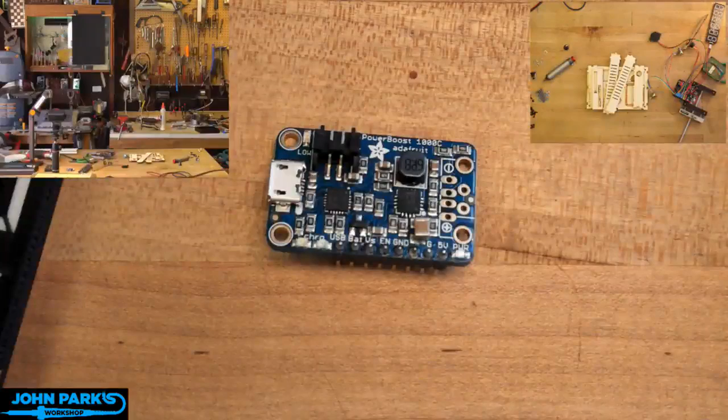So these are the kind of three cameras I've got now. I've got my main workshop camera, I've got the overhead workbench camera that I put in last week, and now I've got this little down shooter that you can see here. This is the same one that Lady Ada uses for her live shows. I think she actually has one in her apartment for the Desk of Lady Ada, as well as one at Adafruit for the Ask an Engineer show.

So this is great, it's called a hover cam. Actually hard to find, they're out of stock most places, but I got my hands on one. And it has an HDMI out, which is the key thing for the way my setup works. It has a decent autofocus - not perfect, but I set it on, I think it's a locked focus right now, down here where things tend to be. So there's my camera remote. Here's an object, so excited about that.

Let's see, I can move my little camera switcher back here, and I'll go to the main workbench cam and talk about what we're going to talk about.

Okay, so last week we built the little demo of the Neo segment display, so that's this guy here. Actually, I'm going to switch back to that view for you for a second - I should go to this one. So I've got this Neo segment display, and I've also got my little phone pad keypad, Matrix keypad.

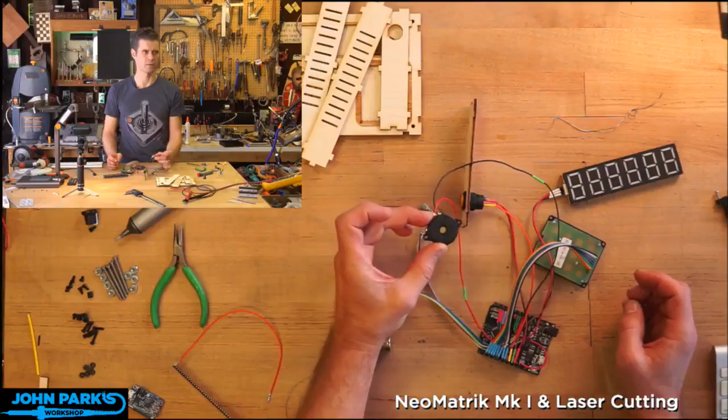Now let's talk about the larger scope of the project. I'm going to take this off of that little clamp there. So we had last week the NeoSegment and the phone keypad, and in the interim, I also added a speaker. I don't think I had that on last time. Let me zoom this camera down in a little bit.

Let me know in the chat with lots of exclamation points if you have any concerns about the camera. I think that one's in focus, but I can't see it too well. Hold on, I'm going to turn on a couple of monitors over here that'll give me a bigger view.

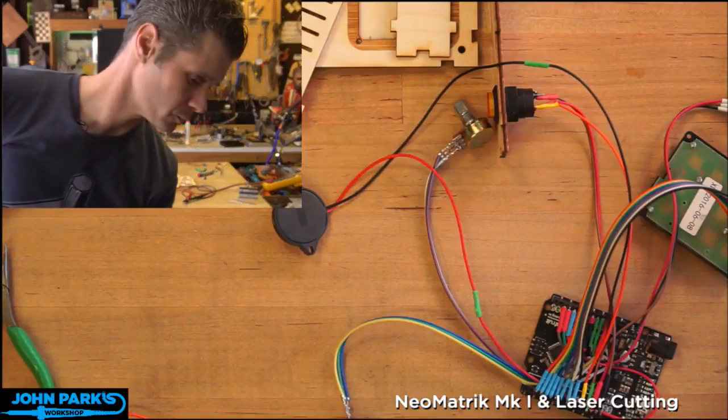If you've ever wondered why a TV station employs a lot of people, it's because there's a ton of things to actually keep track of. Uh-oh, did that break something? Whoa, what is that? What on earth? All right, I'm turning that up. Oh, that's a photo from our Alaska trip. I'm glad nothing embarrassing showed up.

When I just turned on a monitor that this camera up here is plugged into, it used HDMI control to talk to the camera and convince it to start playback. It's doing it again now. That's funny, sorry about that. Okay, so I'll rely on that monitor for this one.

Okay, so I've got a piezo buzzer that I've attached to this so that I can have some sound feedback, and I also added a button. So this is a little lighted switch, actually an on-off switch, and a couple of potentiometers.

Now, I can demonstrate this before we put it together. I think that's probably a good idea. So what I've decided to do is take this concept of - originally I just wanted to test out the NeoSegment display and the phone pad and type numbers onto there. I've now turned this more into a platform for building either a user interface or something like a music sequencer. You could use this to build puzzles, for a crypto challenge, mystery box, escape room kind of thing.

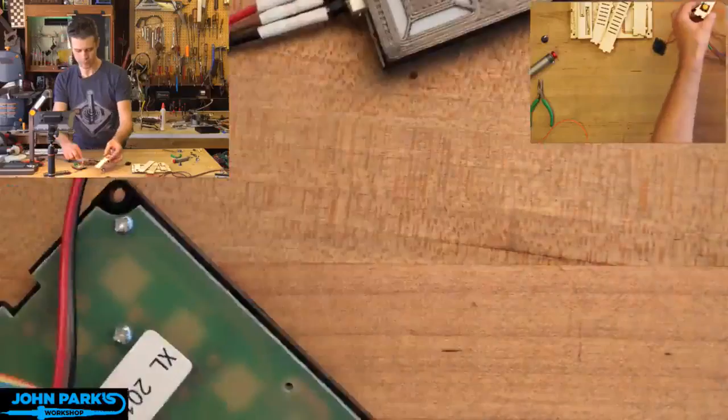And now check this out. When I go to the NeoPixel display, if we go into, this was me pressing the little star key. So what I'm seeing right now is I'm printing the word hue, and then I'm seeing a hue value over on the right as well as the color of that hue. So this is kind of like a little color tester.

I talked with my friend Tod Kurt and Tony DiCola about wanting to use hue, saturation, and value instead of red, green, and blue to talk to these NeoPixels inside the segment. HSV is another way to express color instead of a mix of red, green, and blue. It's a continuum of colors that goes 360 degrees around a wheel - that's the hue part. Saturation is a linear value from unsaturated to fully saturated, and value, or brightness as it's sometimes called, goes from gray to black in the luminance or brightness.

So just by converting this project over to use hue to express the red, green, and blue values, life gets a lot easier when you want to mix colors. So what I've set up now, I think it's this top one, it'll be easier when it's in the case, I have a knob here, and I can dial in different values.

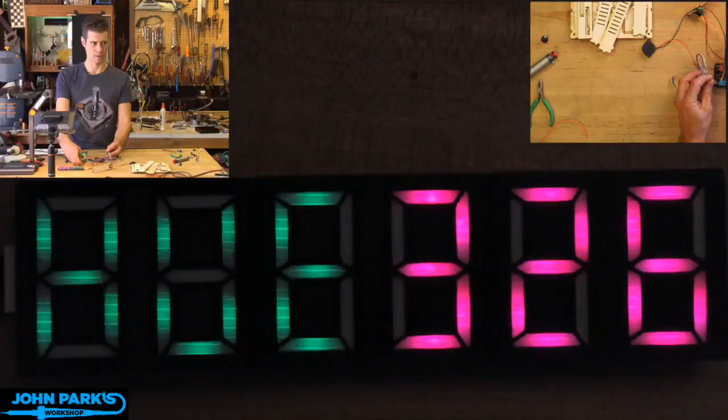So as I change the hue, we'll start at towards the bottom of the wheel, it's red, and then I get into yellows and greens. We'll get up to blue. And you can see for fun I'm also increasing the pitch of the speaker every time I press it. And then back up to red.

And then what I've also decided to do is take that and use that hue value for other things, which I'll show you once we get it all put together.

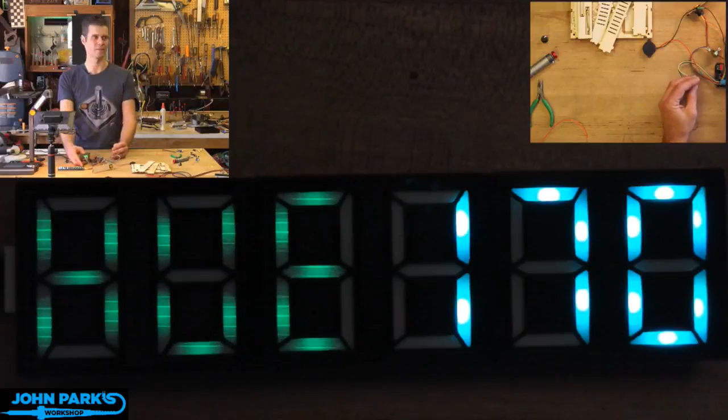The other knob, since we've got this nice close-up right now that you can see, gives us a value, which is the brightness. So we can dim it basically with this, and that's full brightness, which you can see the white kind of starting to peek through there. But that is kind of blindingly bright for me, and here not so bad on the camera. I'll turn that down to something a little more moderate.

Okay, we'll fix that exposure back to something about there. I know you can't see the LEDs too well now, but we'll look at some other stuff as we put this together. So that's the idea behind the project, and what I want to do now is if we take a look at this mess of stuff.

What we got to do next is come up with an enclosure for it. So what I'm going to do is switch over to the computer and show you a little bit of the workflow that I used to come up with an enclosure for this, and some of the little tips and tricks for developing a laser cuttable enclosure, which is similar to some degree to setting things up for a plasma cutter or a water jet, because you can deal with incredibly thin lines, almost no tooling to worry about.

Or you may adjust this a bit for more of a CNC workflow, but you'll see a hallmark of this type of construction is, let's see, has my camera - oh, that camera didn't switch, that's weird. I don't know that that changed over to broadcast what I wanted you to see.

Let's push that over. All right, one second, I'm going to go over to the computer and see if you're all yelling at me that everything broke. I hope not.

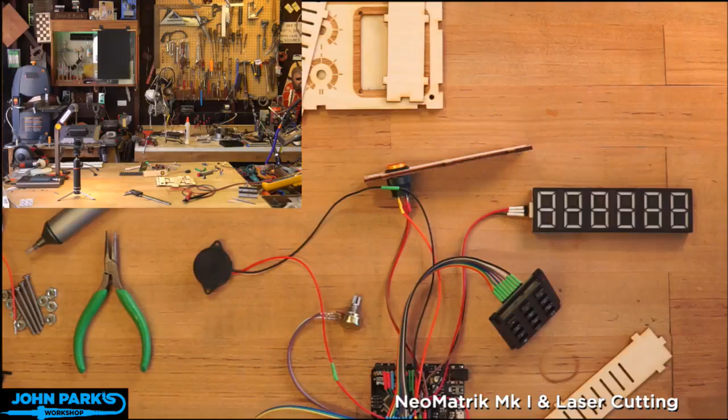Someone on YouTube asked about having letters on Neo segments, but this doesn't have so many segments. The Neo segments can do it, actually. I wrote it down, I have it in my code, I can show you the letters that display well. There are plenty that don't, like M, W, and X—anything with diagonals.

Is that thing just pegged? The CPU is pegged on this machine, so it may be lagging a little bit.

Hey, thanks for the comment about the awesome t-shirt. I was actually thinking of doing a joystick-based project today, but bailed on that when I hit some difficulty, so I'll be doing a joystick project coming up. This t-shirt is by my friend Coop, Chris Cooper, an awesome lowbrow hot rod artist dude, amazing artist, and this is his version of an Atari joystick.

I'm not sure why, but my broadcast display is lagging behind what I'm telling it to show.

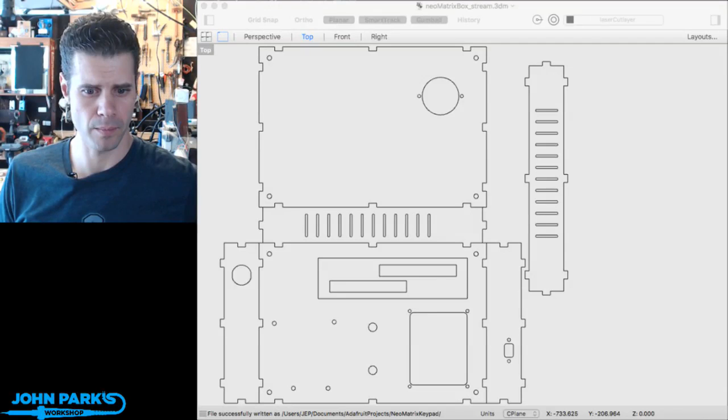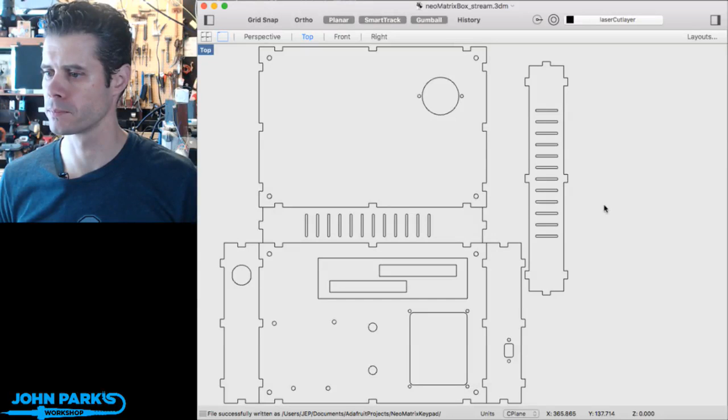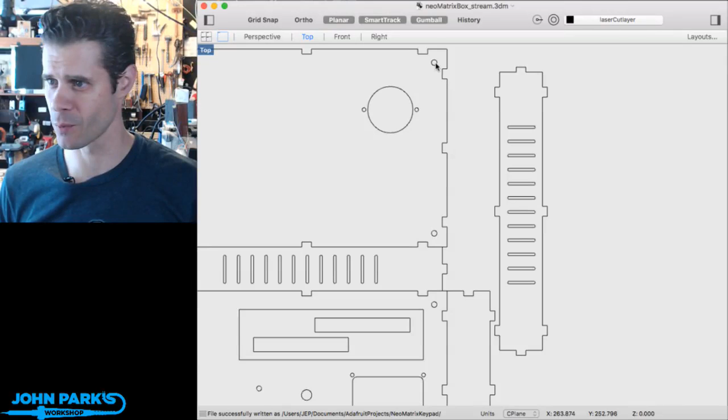Okay, well, you can see Rhino. I won't mess with anything else because that's what I want to focus on for a second here. Lag is gone, okay great. So you should be seeing a CAD drawing—nod if you can see it—and then I'm gonna go into the workflow of how I got here, how we ended up with this. It looks like camera switching is laggy, but this has got a pretty good refresh. Another thing I did was use a different setup for showing the screen capture, so now my cursor is actually where I put it. In the past, when I highlighted text, my cursor was about 3 lines up above. So right now you should be seeing me touching this circle and picking this circle. Okay, good.

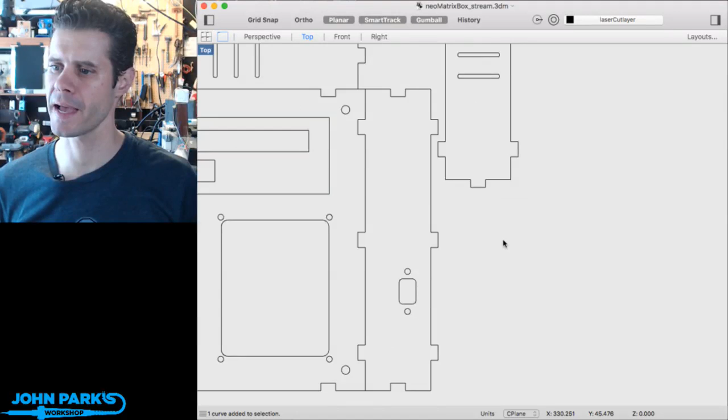So here's the workflow for how I got here. The first thing I did is go through and look at drawings, technical drawings, or just take measurements with calipers of some of the key things. This is the shape of the bezel for the keypad, and this is the placement and size of the holes.

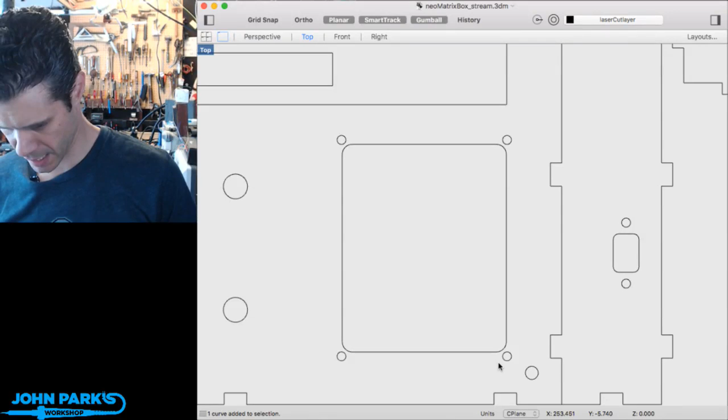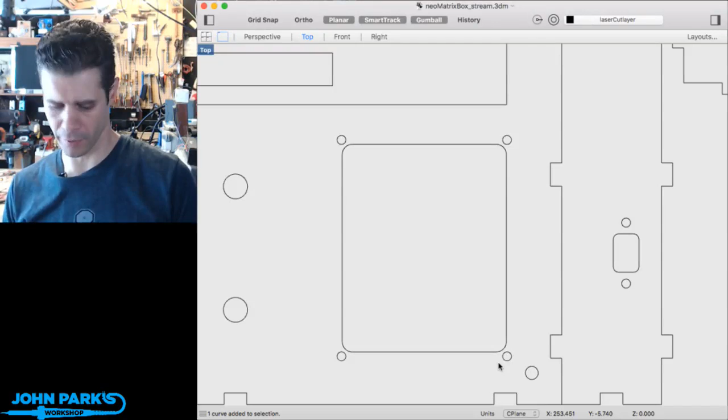Intermittent audio buzz, maybe my USB hub needs power assistance. It's interesting, I have a pretty high power hub, but I think I'm taxing it a lot, so hopefully that buzz isn't too bad. If it is, I'll look at adding a hub. Let me know by the way if anyone knows—I'm using an old iMac here, and if anyone knows a way to add an external USB bus, like a PCI bus or something, or Thunderbolt to USB that adds a full-blown other bus of USB, that would be helpful because I have way too much on the 2 internal buses on this machine.

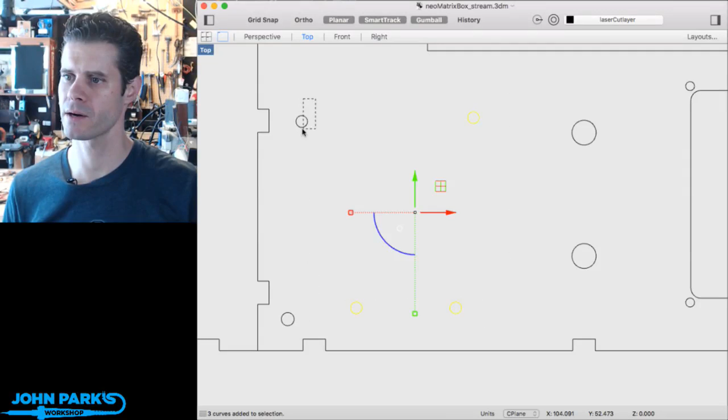Okay, so I started off with creating these curves that are the size of the keypad, and this one is the size of the Neo segment. Then these holes here might be familiar to some people—that's the pattern of the Arduino Metro, the Arduino Uno, and the Adafruit Metro.

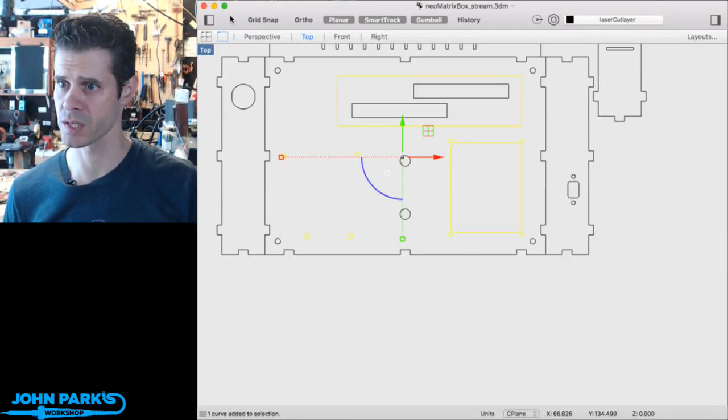So this piece here, I'm gonna do a bit of this from scratch. Once I've measured out and roughly placed these things, let me bring up a bit of UI here.

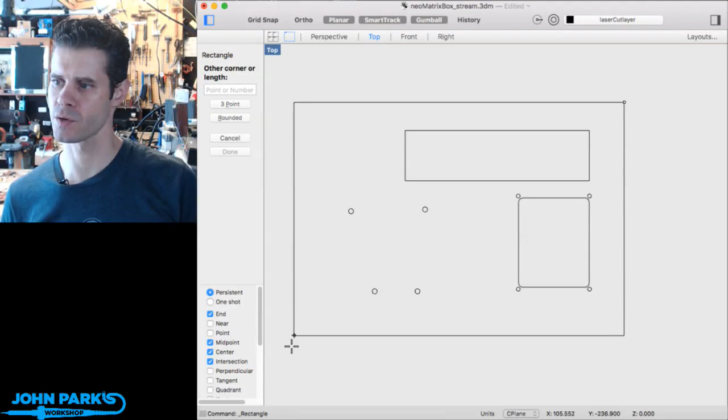Okay, so let me move this stuff out of the way here. So this is what I'm starting with, saying, okay, I got to fit some stuff. Then I went and dry fit that onto a piece of cardboard and saw that I couldn't go real tight in close to things because then I wouldn't have room for some of the wiring mostly, and I have some buttons and things I want to add. But let's say, and I'm just eyeballing this, this is the size of the enclosure roughly that I want to make.

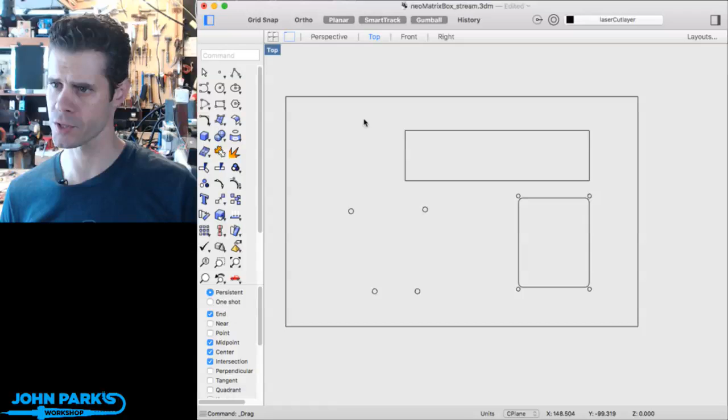Then what I did was created some sides for it, and the depth of these was based on the 1.5-inch screws that I had on hand. So I had some number 6 screws. Usually I use metric, but I had some number 6 screws by 32 thread, and they were 1.5 inches long. So I came up with a proper size, and I'm just eyeballing this here right now.

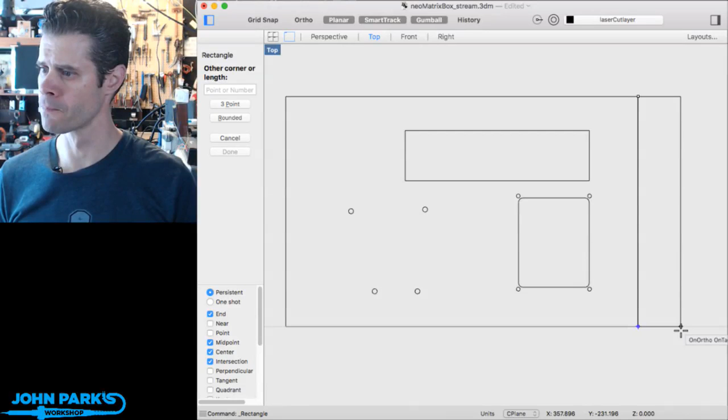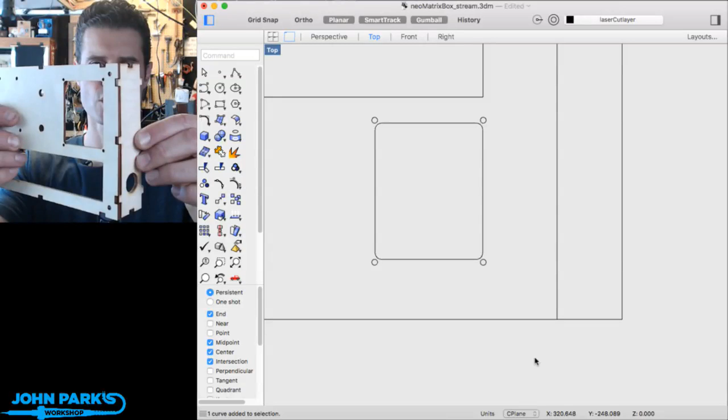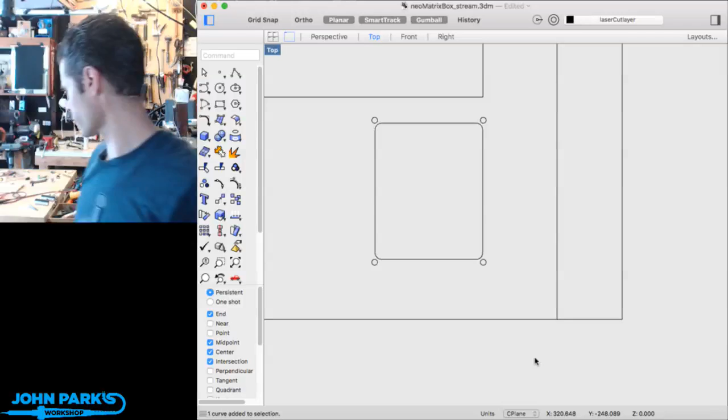So what you do when you want to do finger joints, and I can grab a piece of this so you can see what I'm talking about here. This is a common way of joining things in laser cutting, similar to joinery in real furniture. By creating tabs that are at the same depth as the thickness of the material you're using, you can cut in 2 dimensions and then reassemble in 3 dimensions. I've been building stuff like this for a number of years, like 10 years or so, so it's become fairly intuitive without even necessarily building it in 3D to know how to assemble something like this. But another method is to build your object in 3D and then reverse engineer the curves you'd need from that object.

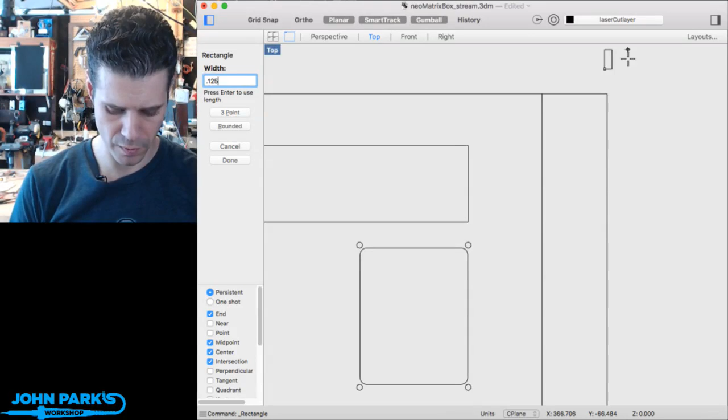So knowing that my material is 1/8 of an inch thick, what I'll do is make a little 1/8 inch square. So I'm going to type in 0.125 inch and 0.125 inch. Okay, so this little 1/8 inch square, I know if I cut that depth out of, let me move this properly. Okay, so that's right on that line. So if I cut something of that depth out of, let's say, this piece and jut that out from this other piece, I will have a nice seamless joint.

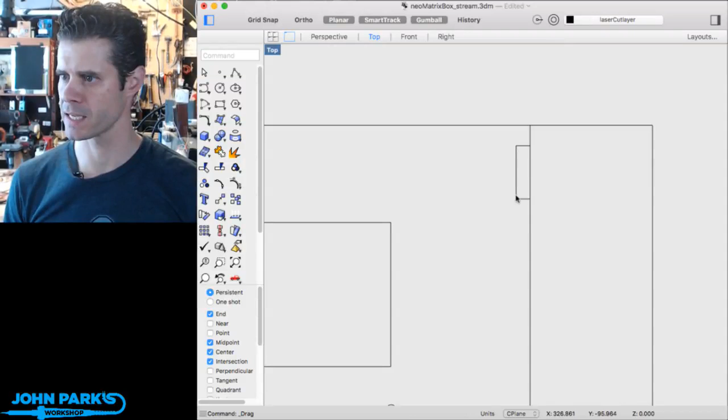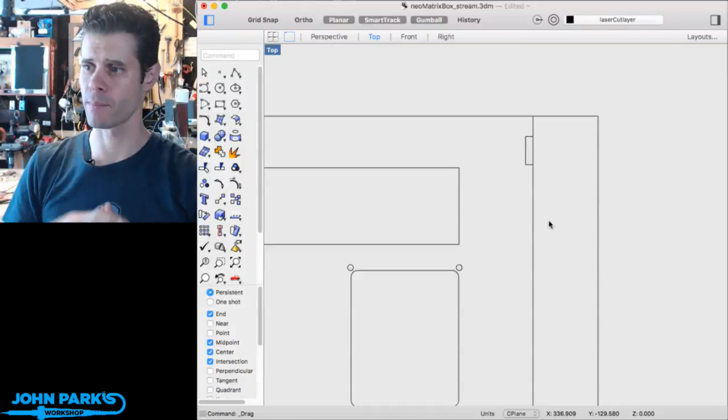And they don't have to be square. This is the depth that matters, but this height here, so in this view, this width matters, but this height doesn't. I can create some nice little tabs that will interlock and keep the thing closed up. One thing I see people do sometimes is they will just put sort of endless tabs, like every other 1/8 inch they've got a tab, which is a certain look, and it may end up being stronger. It kind of creates more connection points between the two. But I found that often you don't need to, you can space it out a bit.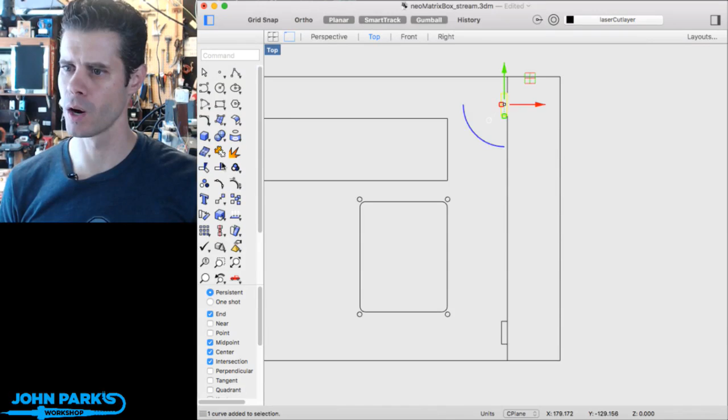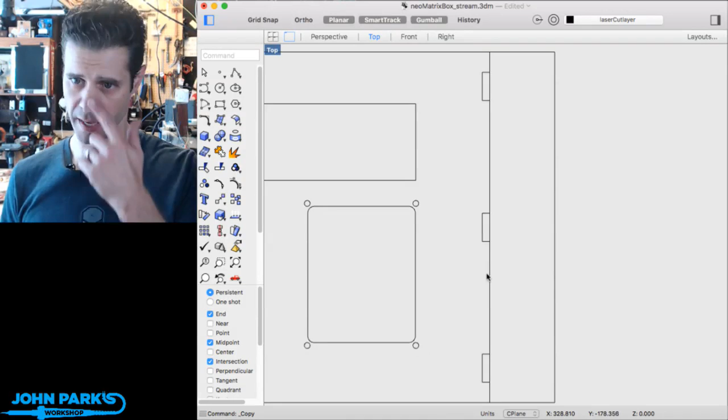So I'll take something like this, and I'll mirror it across the midpoint here, and then maybe I'll duplicate one and place its midpoint. Sorry, I got to turn off center snapping here. I'll place its midpoint on this line's midpoint, and you can see those little pop-up windows telling me when I've reached some sort of condition for snapping. So that's not exactly how they made the one that you'll see up here, but let's pretend that's the way we want to go with this.

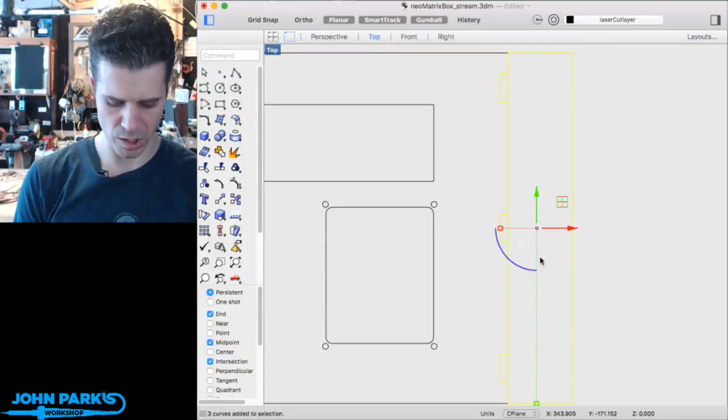Then what I can do is create essentially booleans. So I'm going to union these tabs to this piece, and I'm going to carve away, or difference, those tabs from this piece. So that looks something like this. I can pick these pieces and do, by the way, sorry the highlight color isn't very easy to see, this yellow, so I'm typing, you can see that, right? Yeah, I'm typing curve boolean, and then it says, what do you want to keep? And I'm just going to click on the parts that I want to keep, and you can see it's making a single nice piece.

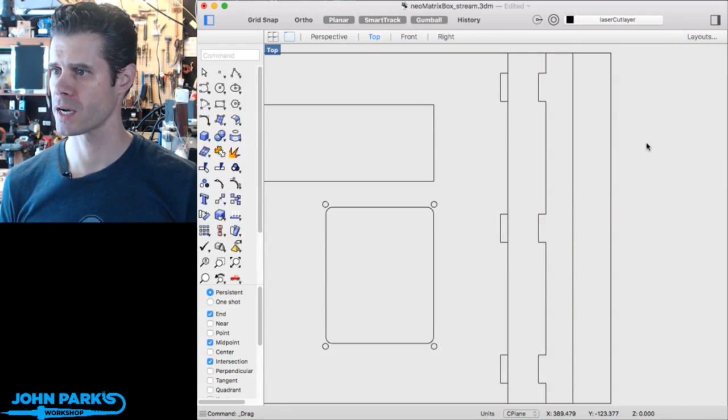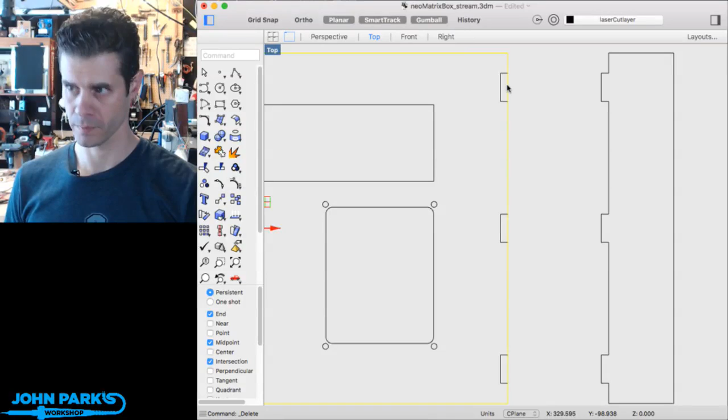Move this off to the side, single nice, whoops, move a little further off to the side. So that's my new piece. I told it not to delete the old stuff. I can actually get rid of that, but I still need these tabs here to carve away. So you can imagine what's going to happen here. I'm going to do another curve boolean, and I'll just keep this part, and now I can delete all of that jazz there. Oops. And so now I'll have pieces that will join together nicely.

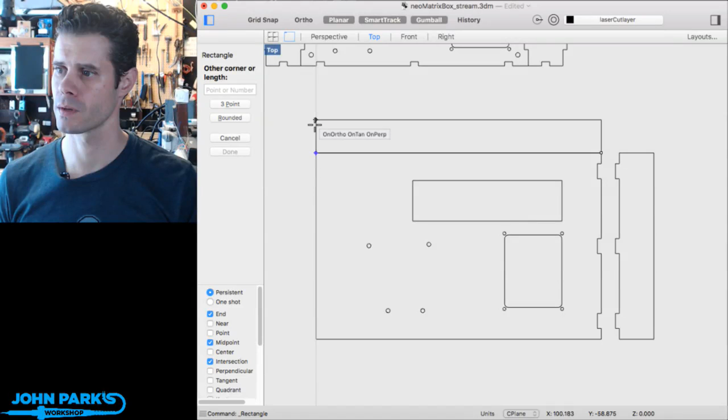If you want to visualize this stuff in 3D as you're building it, which I recommend, because sometimes what you'll find is you'll forget to account for things. Here, I'm going to dummy up an example here. If I build, let's see, I'm just going to duplicate this one to do that actually. So if I'm going to build this back piece here, I will rotate that down.

Okay, so if I take this, and this is crude, but I can actually scale it and it'll all work. It'll just have wide tabs on it, but that's fine for this case. So I'm going to just take that from there to there.

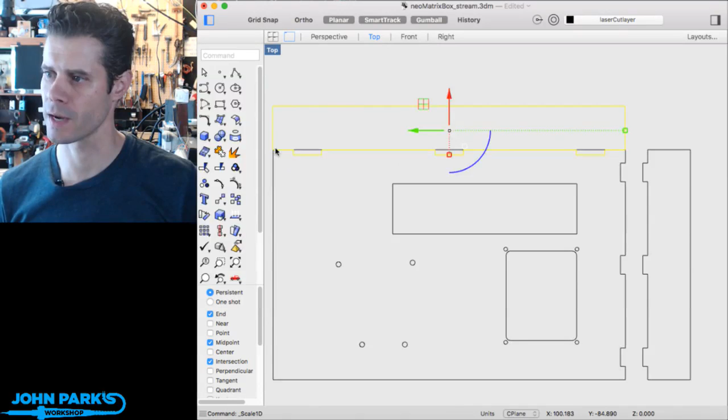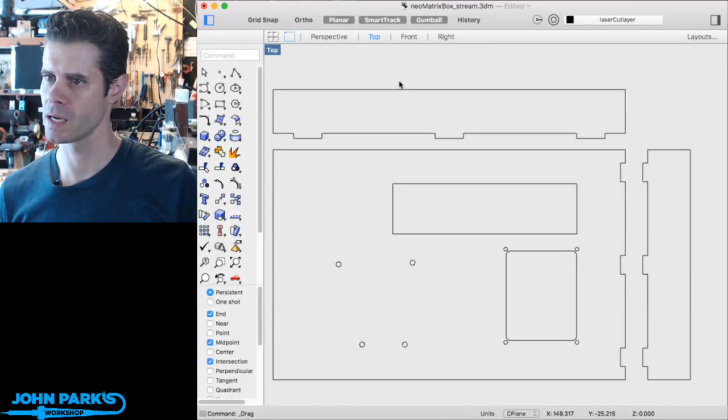I won't worry about cutting these tabs out in the interest of time, because we've got a half hour left. This looks sort of reasonable, but watch what happens when we take this into 3D. I'm going to take these three pieces here, and let me go to a perspective view, and make planar surfaces of them.

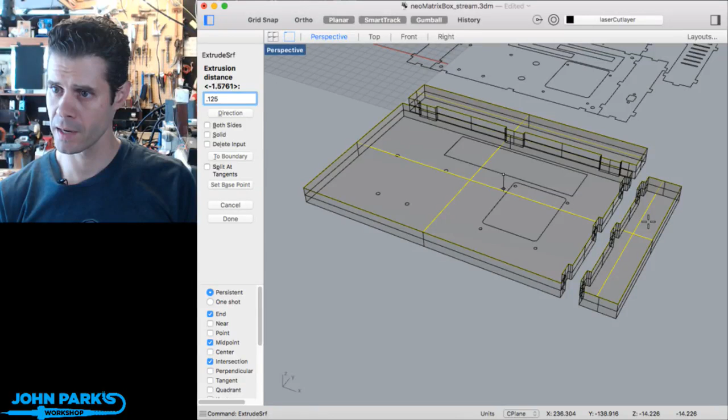Then I'll extrude those planar surfaces 1/8 of an inch. So I'm just going to type in 0.125 inches. And then I'll cap the tops of those just by duplicating what was there.

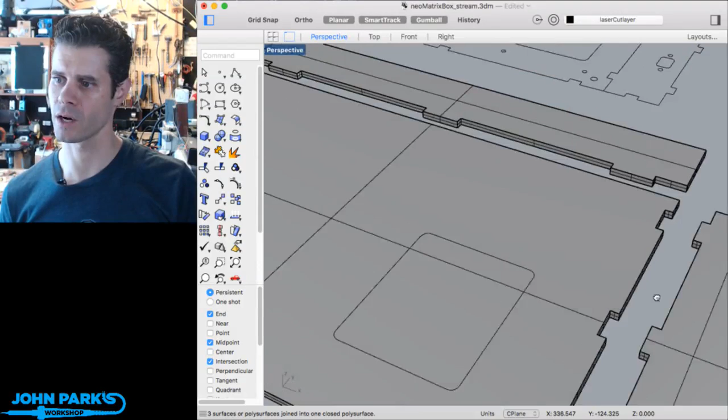And I'll just join these into single objects. I didn't carve these windows out of there. I would recommend that, I just didn't do it in this case. I forgot. So now let's take a look at how this would join together.

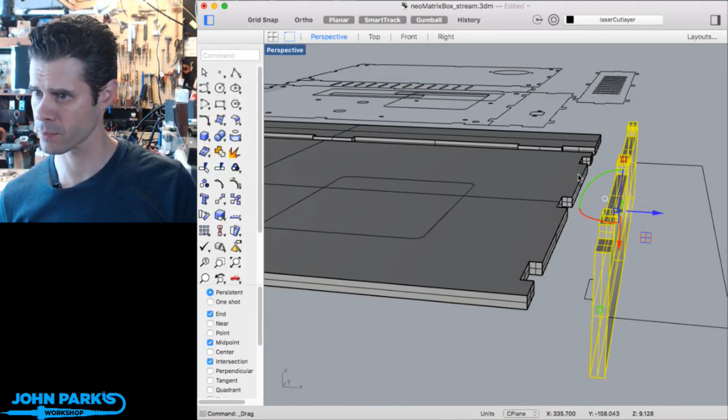So I'm going to take this and move it over here. I didn't get that pivot great, but I'm going to rotate it anyway and then put it into place. So if we take, let's say that there. Okay, that joins up nicely.

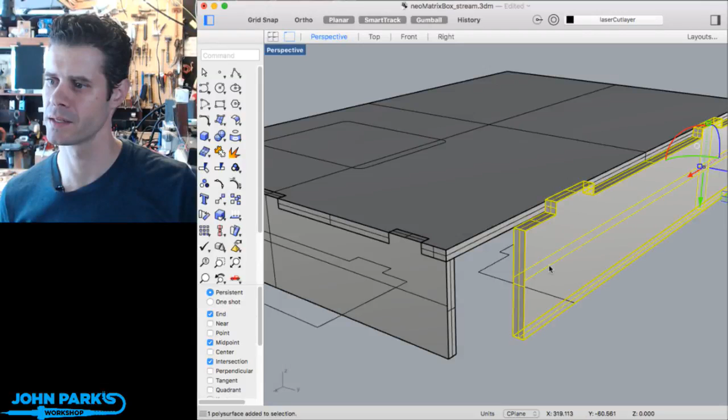And now we'll take this one, rotate it there. We'll pretend those tabs exist, and in the cutout of here. And if I move that into here, you'll see. Okay, that would be fine, but these are intersecting each other. We shouldn't see these intersections.

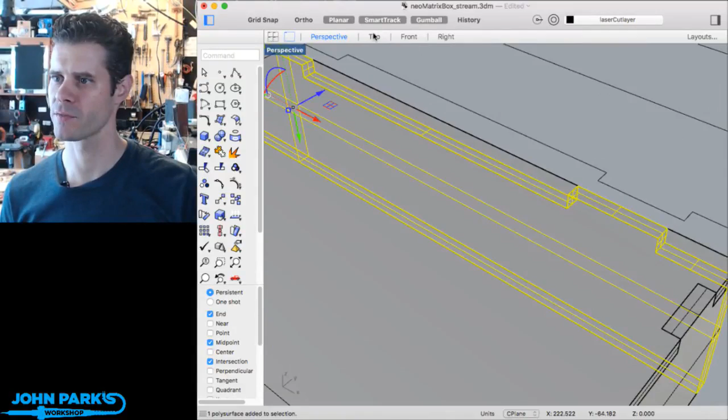This actually, I made it too wide. So the width of this original—let me go to top view again. The width of this original piece forgot to take into account the 1/8 inch depth of this piece of material that's going to land here.

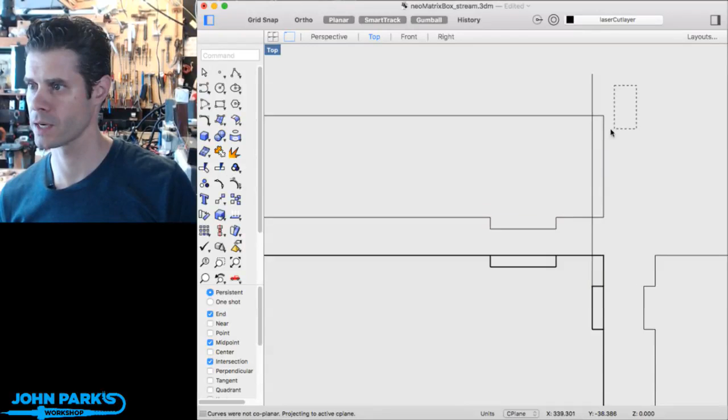So these you'd actually need to properly construct, or I can show you if I just chop these off, and I'll just curve boolean that. Okay, that's what that should look like. Make sense? So this is this piece accounted for.

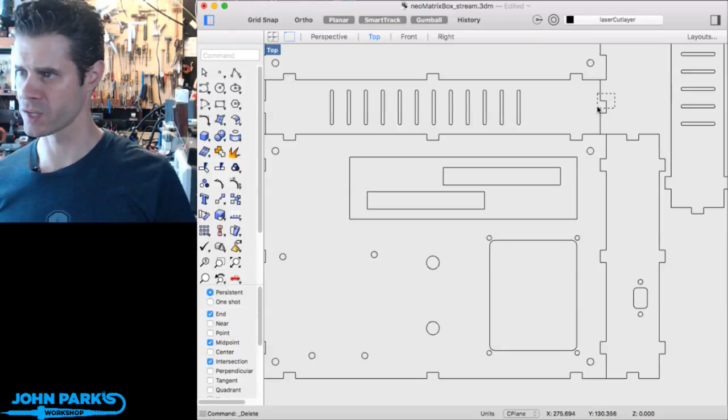So if you look up here at the one I made—actually, sorry, I flip-flopped those. So I made the sides the full... oh no, that's right, yeah. So I made these sides the full depth of the box, and then this top piece here is accounting for that extra depth of the material here.

So let's see, other things that I did. I made some little cutouts for vents. I stole a couple of these pieces from my Crypto Countdown Challenge box.

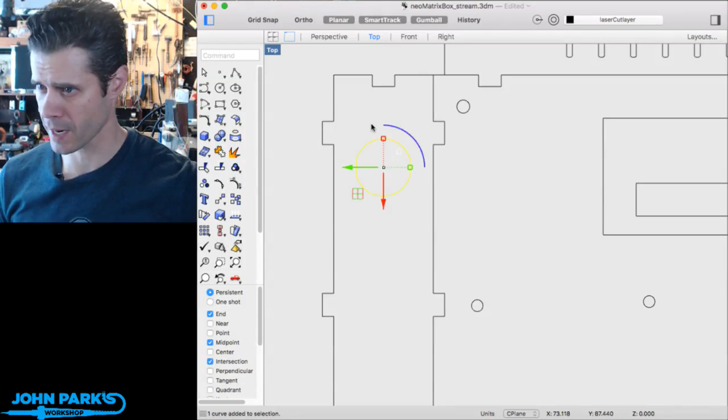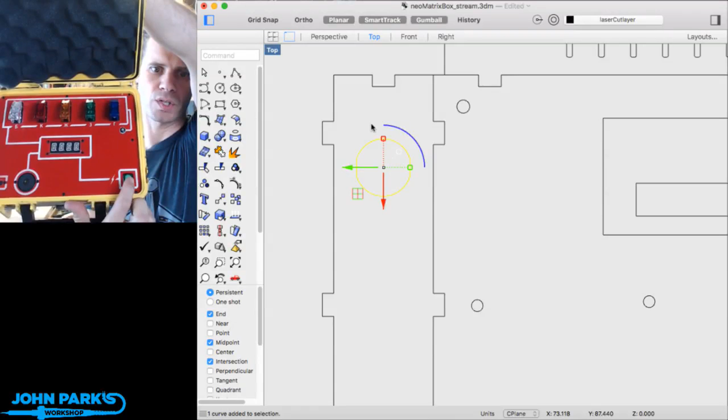So if you remember this guy here, I built a laser cut panel for this. If you don't know this one, go check out the Mystery Box Crypto Countdown Challenge. So this button here I'm reusing, so I was able to reuse the CAD drawing I made for that, and same with the positioning and size of this piezo buzzer and its screws and the USB port. So all of those things were reuses, which is nice. I just copy and pasted them. So there's my piezo and there's my little USB port.

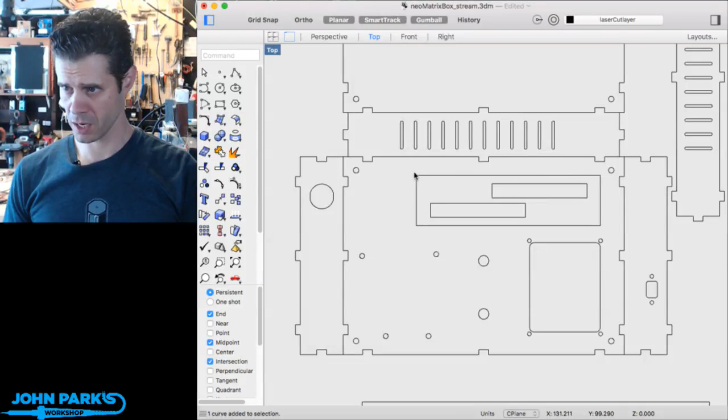This piece here that I'm cutting out, I'll show you when we go to assemble this in a second. This is a cutout to fit the Neo segments. These are two pieces that I just needed some scrap wood for, since I decided to build this from wood instead of acrylic. You can do this with acrylic as well, using acrylic cement. But with wood, I knew it would be easy to mount, since there's not a great way right now to mount that Neo segment without screw holes on the back.

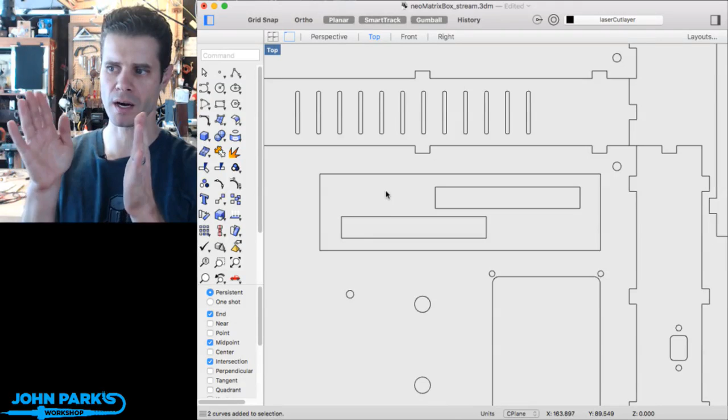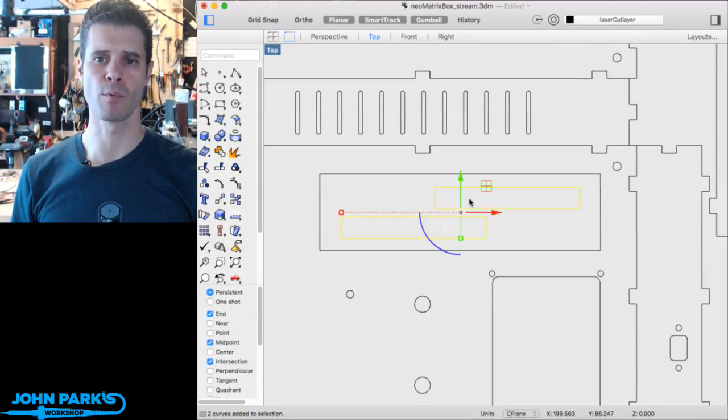So you could mount that to a thin plate of something, but for the type of construction method I'm using here, I wanted some ears or something that would offset from the object and allow me to clamp it into the back of the case. I'll show you what I mean by that. But these are just scrap wood pieces that I laser cut, that I hope I remembered to keep.

I think I did. So if you look here, that's that piece cut out, and I've got to go fish in my scraps for the two pieces that I forgot to keep. Yeah, oh, here they are.

So I needed these two guys here.

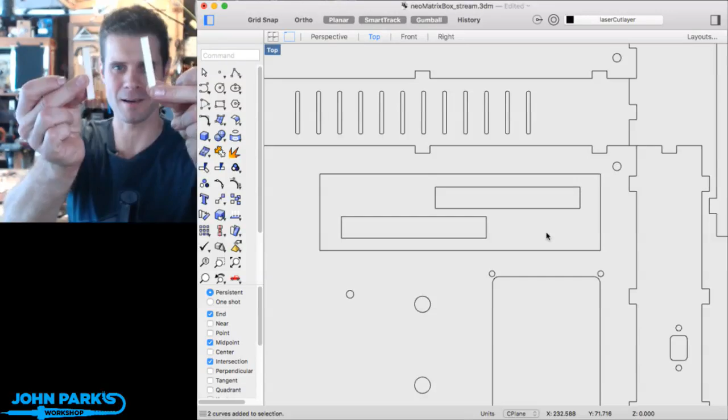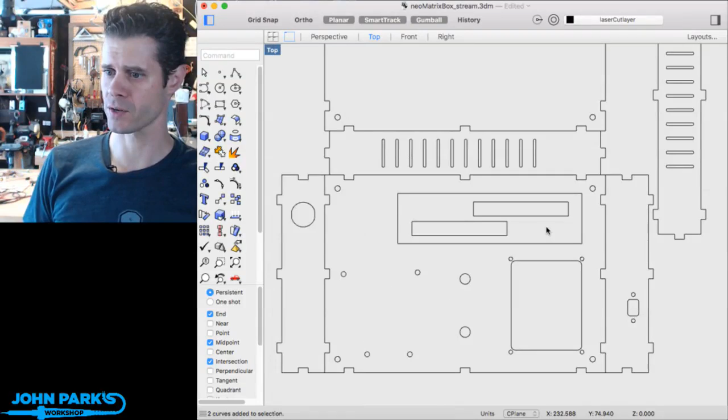Someone said in the chat that if you go to makercase.com, it's a parametric case generator, which is fantastic. Especially if you're just trying to make a box, give it dimensions, it does the finger joints for you, and then you could take that. I think it outputs an SVG file or an Illustrator file that you can then go and modify further. But that's a great starting point. I definitely recommend that if you haven't built these types of things before.

These are knob holes for the potentiometers, and that's about it. So let's cut to... hopefully this will not slow the machine down too much as it tries to.

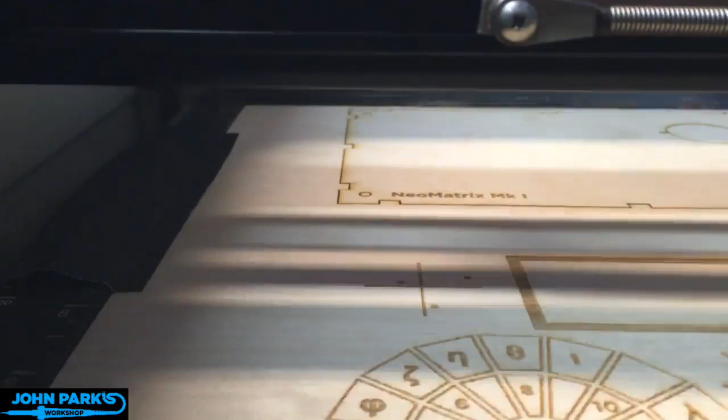Can you hear me? I think Wirecast has been eaten by the movie. I'm gonna try to quit.

Hey, all right, it looks like I'm broadcasting again. I will not touch that movie, I promise. Thing ate the machine, too much data. So let me know if you see this back again, and I'm going to actually see, can I convince the... yeah, I don't think I can convince the Facebook stream to restart. I'm going to get the new stream key, so let's see.

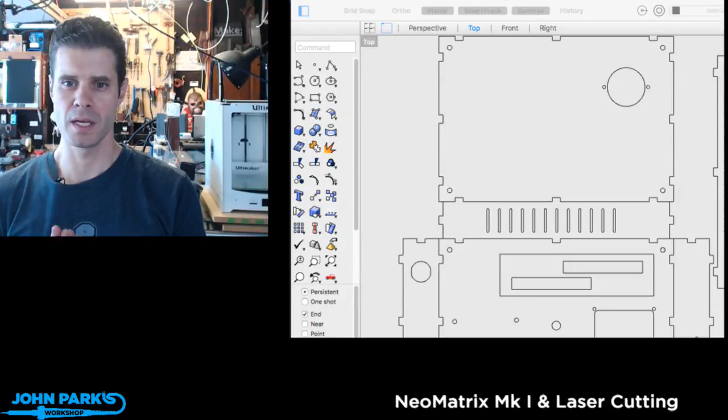So I have just built a laser cut case out of wood for the NeoMatrix Mark I. And this is the file that I built to cut curves in Rhino out of wood. And then the other operation I did was etching.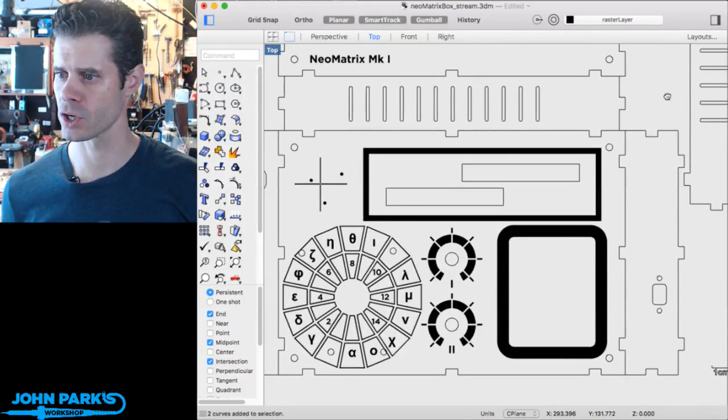So let's turn over to this raster layer, as I'm calling it, and I'll leave on the vector layer. So these are essentially raster graphics that get etched a line at a time, instead of vectors that are followed by a more mathematical curve. So these dark black parts, I then run a second pass - actually this is the first pass I did.

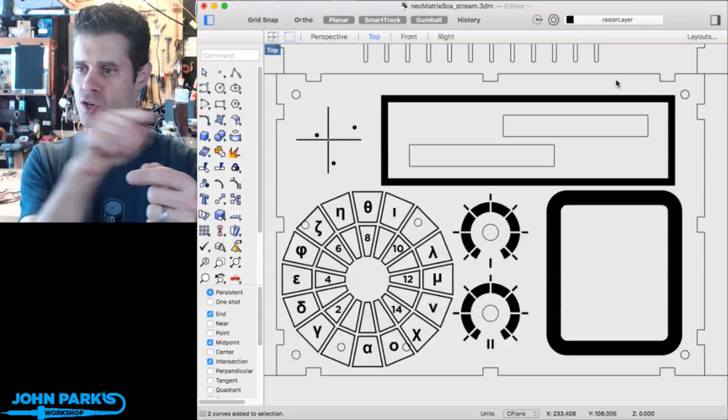If you saw that video that looped 5,000 times earlier, what I do is I set the material in, and then I have the laser on a low power, high speed go through and etch in, essentially burning the surface without cutting all the way through these patterns.

So I put a little border around where the keypad is and the display, and then I put some markings for the potentiometer so that, especially if you're going to use this in a puzzle setting or as something for, let's say, a music sequencer - because this NeoMatrix Mark I is an interface that you can use to make anything. It's the interface of infinite possibilities.

So you may want to have some markings for your potentiometer that are not just you're experiencing something changing, but you can say, oh, if I go up to that mark, I'm going to be at yellow on a color hue wheel, or that's going to be a particular pitch for a sound thing.

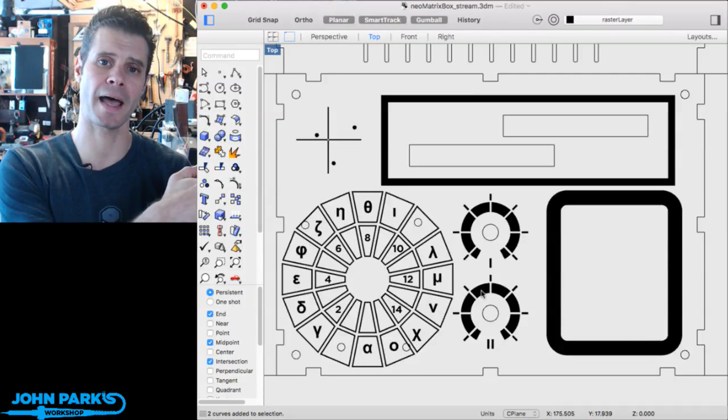And then I've added some other markings here that are to be used in puzzles. So these files are going up in a tutorial that I'm going to be posting on Adafruit Learn Guide, so you'll be able to build your own. Or if you don't have a laser cutter, you may be able to get access to one at a makerspace, or you can also send files to services online that will laser cut for you - Ponoko being the one that I can think of right now, but there are probably others.

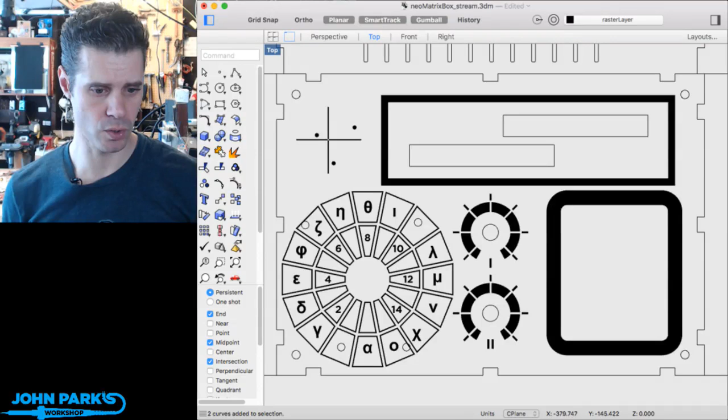So I'm going to switch over now to the workbench, and we'll take a look at these files that have been cut and putting them together.

I'm cutting it close, which has got a little bit of time. So here you can see, I'll switch to this camera view.

Close up on these - here you can see the etched patterns in the wood. I etched them fairly lightly. You can use higher settings to get a darker burn if you like. You could also paint this, then etch if you have a safe paint, or you can use dyes.

So that's the faceplate. Here is my button knob side. This is my button side. This is my USB port side. That's extra - these I'm going to use for attaching the screen in.

So let's go ahead and start attaching stuff. The way that I have this laid out, I'm going to take everything, bring it over here. You can see I wired this already. And what I'm going to use, let's start with the microcontroller, the Metro here. I'm going to zoom in a bit on this view.

So for that, I'm going to use these little - let's see if this camera view will be helpful - hex standoffs and medium and short nylon screws.

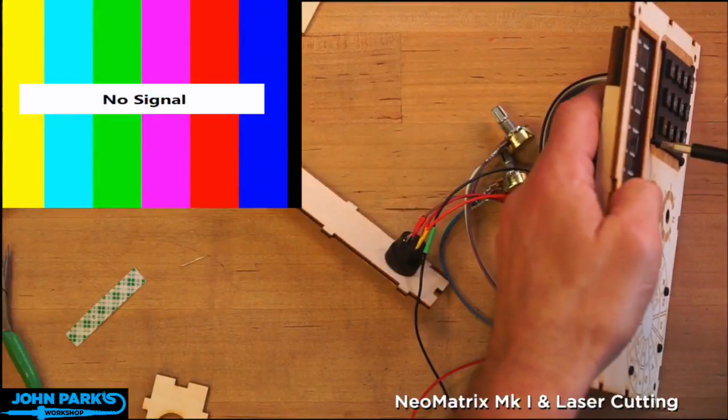Like getting those things off of your... Oh no, I just lost a camera. Well, you can still see what I'm building, hopefully. As if on cue, right? Let's pop that back in there.

Okay, so let me throw these. These potentiometers have threaded shafts on them, so I could put those in like this. And then I have some washers and nuts I can throw on there.

And I'm going to go turn that camera off for a second and see if that was just a case of it overheating. It's not that hot here today, although it's going to be 93 degrees on Thanksgiving in Los Angeles. Is that crazy or what? Not cool. 93, I say. Unbelievable.

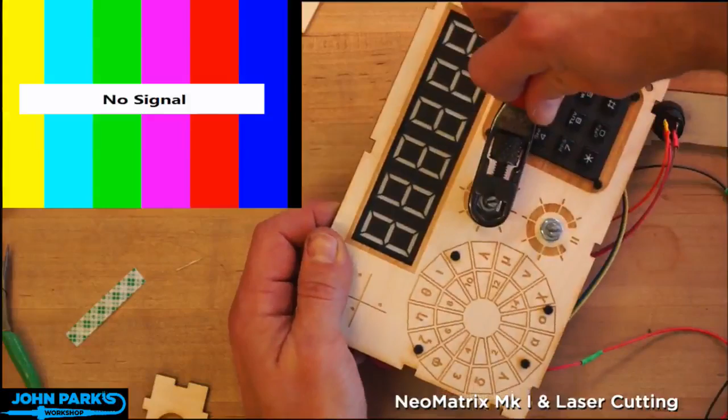And these ones, I don't want these moving, and I trimmed the little tabs off of them. So I'm going to use a little bit extra torque on them. Again, you can't do this sort of thing as well with acrylic, but with wood you can squish down into it pretty nicely.

Okay, let me just turn that camera off for a minute, and then we'll see if we can bring it back up later. I'm going to hide that one so we're not looking at color bars. And I think that'll give us a little bit of a laggy switch for a second, but I'm just going to put these knobs on, and they just press fit on.

Okay, that's everything for the front of it. I actually didn't, I've already got this button switch here connected. I forget where, I think I'm throwing that over on this side.

And then, oh, one other thing I've got, USB. I want to be able to access the USB on this. In the configuration I've built, I was thinking it would be for a puzzle, something you go and plug in somewhere and use. So I didn't put a battery in it. You could do portable power with it for sure, but I'm actually going to run a USB extender, a little panel mount extender, over to, let's see, I think over here was where I had decided would work well. I'm going to run it over to here, and then I think I've got this button up top.

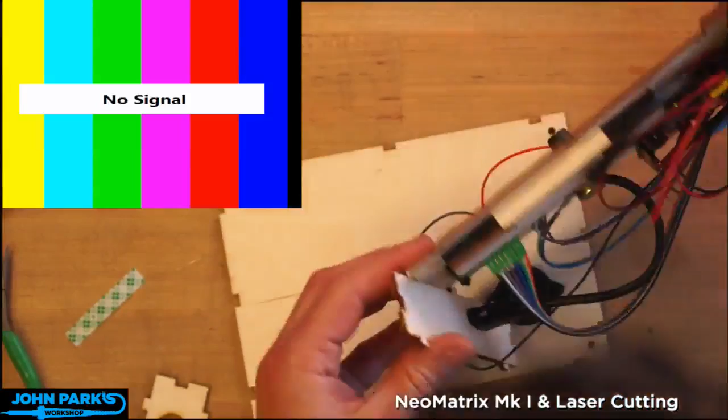Okay, I'm going to go ahead and power it on just to make sure things work before I fully close it. So I've got a USB... that's a good sign, we have sound. Good. I'll say that's probably working well enough to assemble, and then we'll fully test it.

So here I would probably recommend gluing. I'm not going to do it right now in the interest of time, but I'll probably put this back together on camera for the tutorial yet one more time. Getting a lot of experience with it.

Before I do that, someone was asking about the connections. So here's these number 6 screws. I know I'm mixing metric and imperial, or SAE. What I'm doing is bolting them from the top through to give myself something to connect to.

And these are little cap head hex screws, which are a little more finished looking on a project like this, I think, than a Phillips or a flathead.

I really hope you're still not seeing that no-signal color bar thing, but I suspect you may be, because in Wirecast I see 2 camera views. I see the shot I've told it to display, and then the shot it's actually broadcasting. Just like when it crashed before on that movie, I'm seeing that thing didn't want to change.